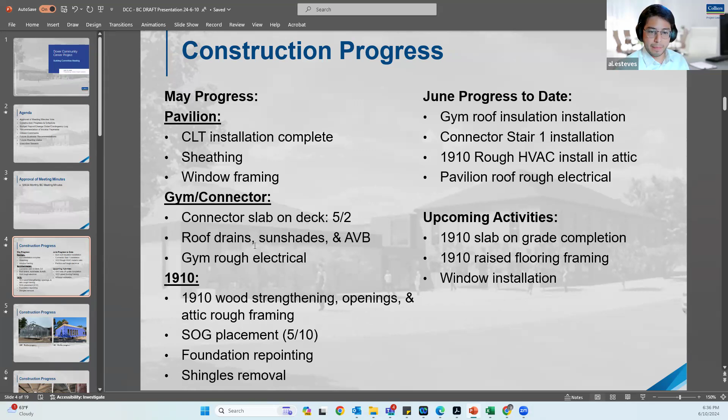Can everyone see my screen? Yes. Excellent. All right, so I'll move right into construction progress. We had a big month during the month of May. At the Pavilion building, we completed the cross-laminated timber ceilings. You'll see a picture of that. The exterior sheathing was completed, as well as the window framing. At the gym and the connector building, we placed a slab on deck at the connector in the beginning of May. We've also completed the roof drains, the sunshades, as well as the air vapor barrier at the gym building. We've also completed the rough electrical at the gym.

At the 1910 building, we've completed the wood strengthening of the structural members, as well as framing of the openings for the skylight, mechanical equipment, access, and rough framing at the attic. We've completed the slab on grade placement at the 1910 building. Foundation repointing is ongoing at the exterior foundation, as well as removal of the asphalt shingles. Since the end of May, additional progress includes installation of the insulation at the gym roof, installation of stair one at the connector piece, rough HVAC electrical installation in the attic, and rough electrical at the pavilion roof. That was necessary in order to continue with the roofing.

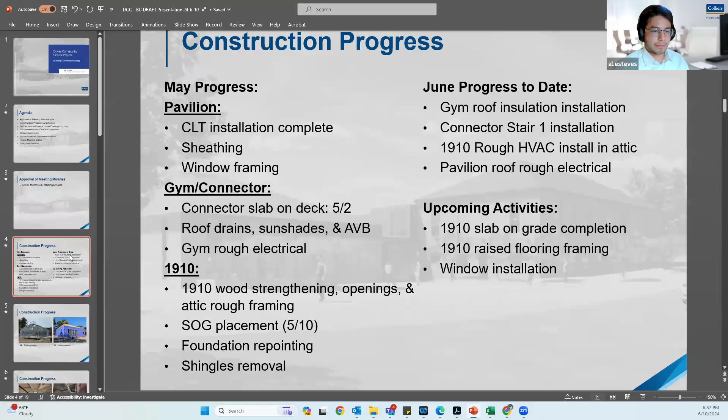And upcoming activities: completion of the slab on grade at the 1910. We're going to talk about that; we have a PCO related to that. Framing of the raised flooring at the second floor of the 1910, as well as installation of the windows. Any questions on the construction progress? Okay, let's look at some photos.

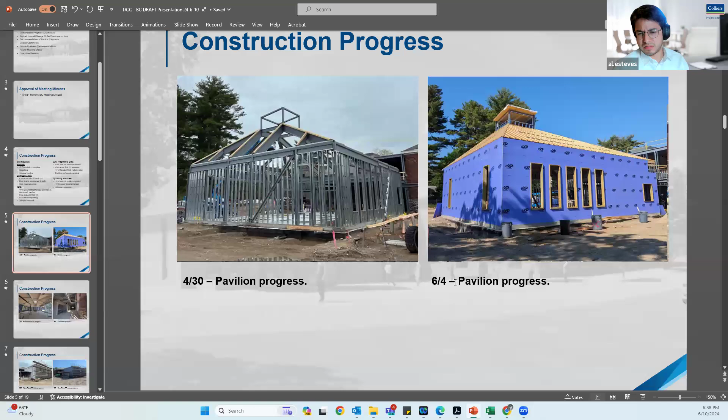So looking at the pavilion building, the picture on the left shows what it looked like during the beginning of the payment period, and the picture on the right shows what it looks like as of last Tuesday. So you can see the sheathing is installed, window framing. And looking inside of the pavilion, it's a great space to be in. You can see the exposed CLT ceiling and the exposed structure. So it's a really nice high ceiling space, and it feels really nice with the skylight. And the picture on the right is looking at the connector piece where stair one was installed, which was after I took this picture.

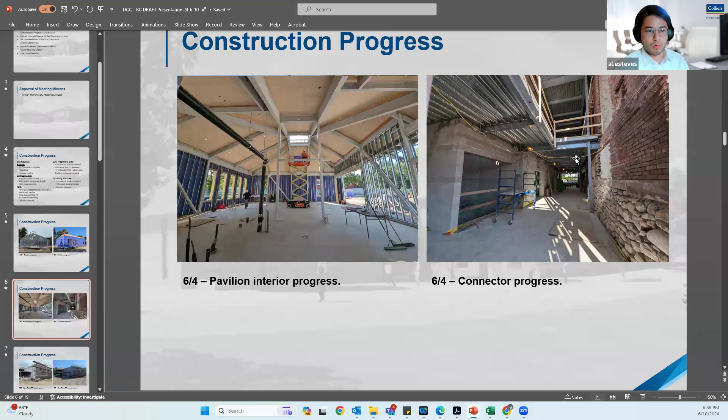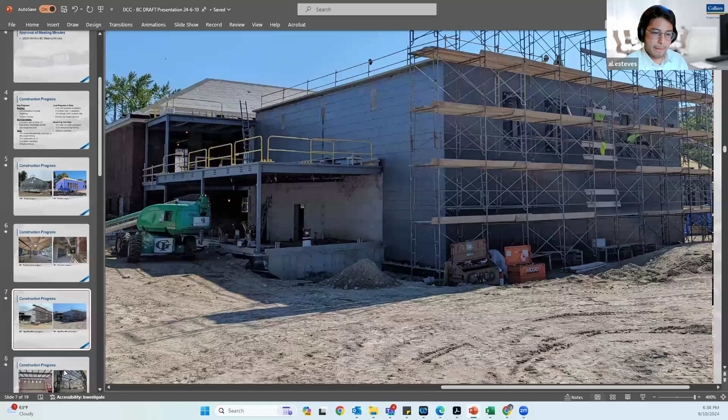Looking at the gym, progress in May, like I mentioned earlier, installation of the air vapor barrier on the exterior. You can kind of see it on this picture. And you can also see some of the sunshade structural brackets going. Inside of the gym building, like I mentioned, all of the roof drains were installed, as well as the rough electrical for the light fixtures.

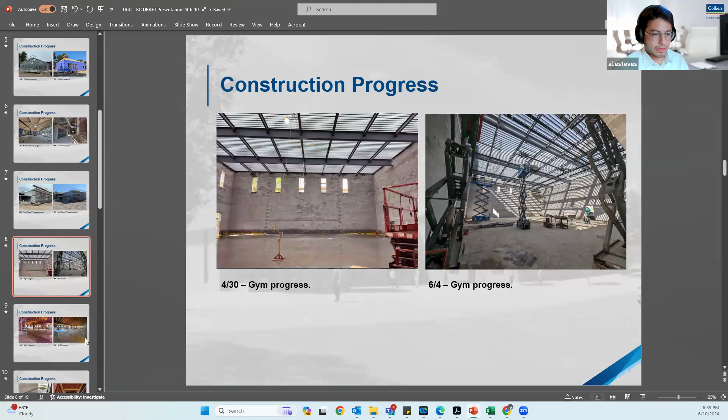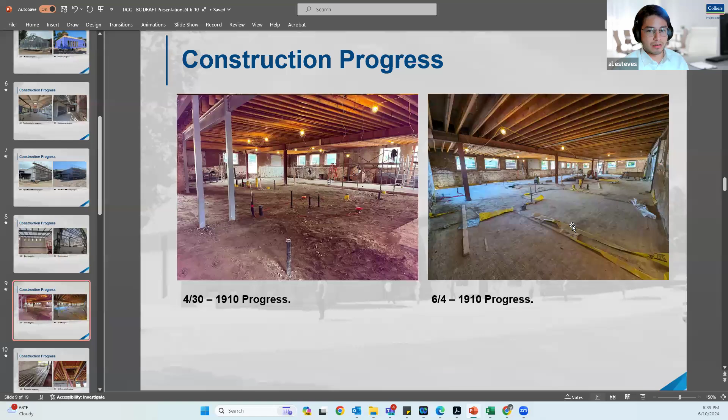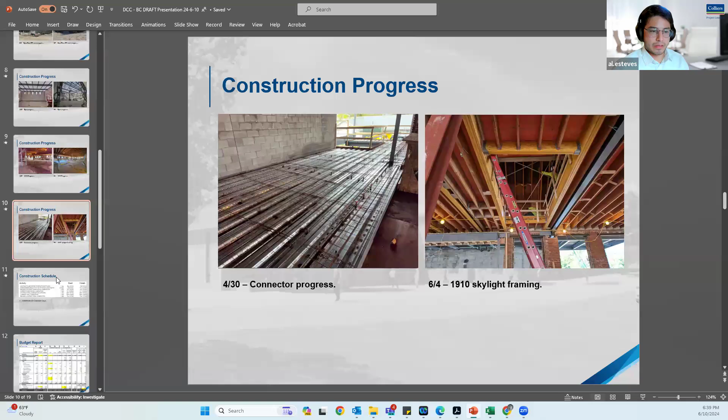Okay, moving on to the schedule. I have a couple of updates. The first thing is that we have been working with town council. We had a couple of meetings with them, and their recommendation was to withhold a portion of the general contractor's general conditions for the month of May until a corrective plan is provided. M. O'Connor is currently working on that. Corrected schedule? Yes, correct. Corrected plan and recovery schedule.

Any more questions on the schedule? Sorry, go ahead, David. Is there a timeline that O'Connor is proposing to get back to you? No, not for the contractor. They have not given me a timeline of when we should anticipate to have that delay claim. However, we are withholding their general conditions until that is provided.

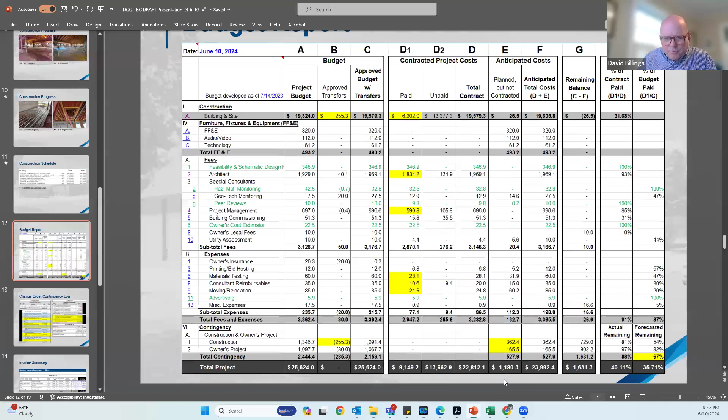So the total risk at this point is 360,000. 360,000 for construction, and then there's other soft costs for 165,000 for a total of 529. Correct. Okay, and that leaves us with 1.6. Correct. Okay. Yep.

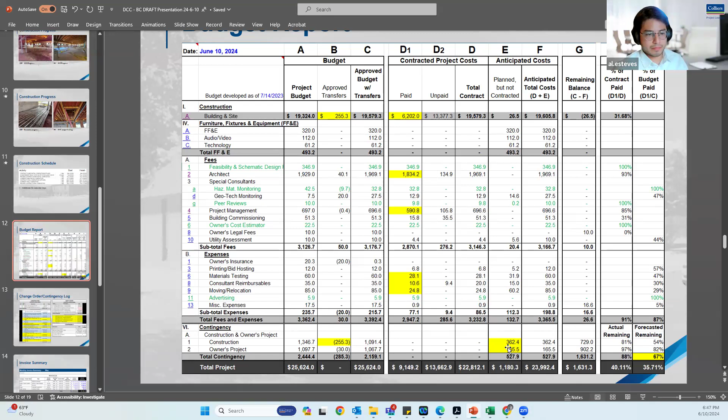As an example, PCO number 25 for the water main connection, I believe their initial price was around 66,000. Looking at creative solutions with the team during one of the OACs, we were able to bring that down to around 30,000. That involved closing of Springdale Ave. So that was thinking outside the box on ways to reduce cost. But most of these went back and forth a few times and asked for additional backup. And we feel that these PCOs are well supported and that the pricing is fair and reasonable, and we recommend that they be approved.

So starting with, I'm not sure how much in detail you guys want to get into, but starting with PCO number 12, that's a relatively small number for 3,500. That falls under the coordination category. There were a few changes that were made to some of the outlets on the floor to be tamper resistant, as well as a couple other changes.

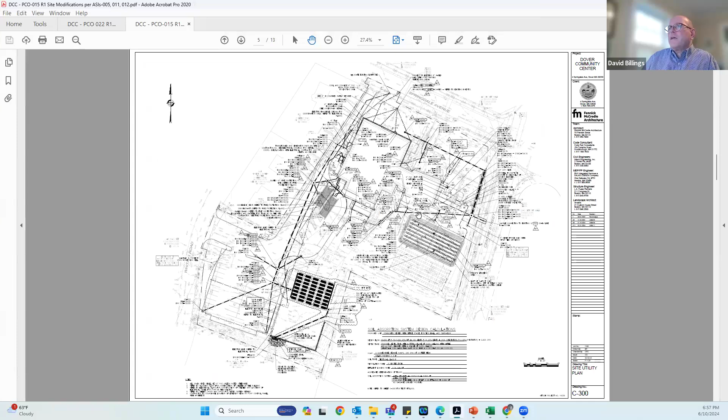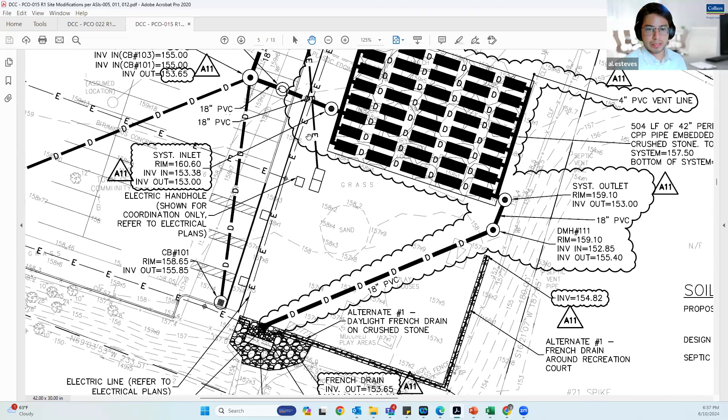And it looks like there's an 18-inch drain that's going towards the fence and then dumping out into that swale. Has that always been there? Because we had a lot of conversations with the stories next door, and we do not want to be draining onto that swale. Correct, David. So this hasn't changed as far as where the piping goes. You are correct that there were 2 drains that were added. Those 2 were approved during the first PCO in the last building committee meeting. Well, I want to make sure that this is not impacting the abutter at 12 Whiting.

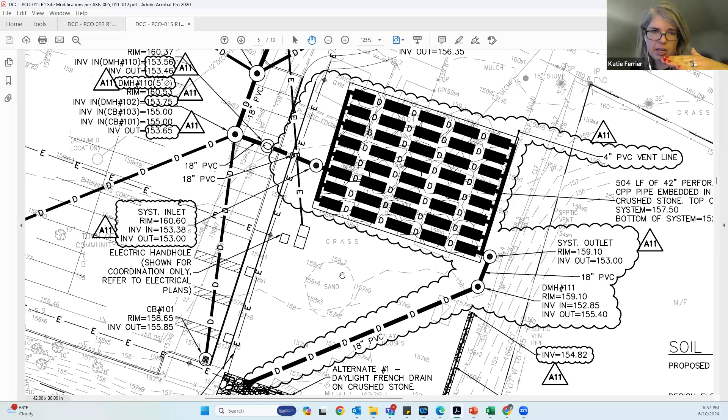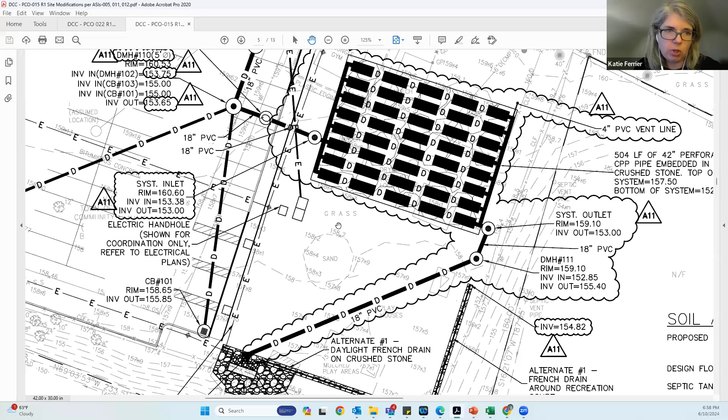Yeah, David, to answer your first question, that drain that's on a diagonal, it used to just be vertical. So there has been a drain, but the location in the lawn has changed primarily because of where the outlets are that are kind of on the right-hand side now. They were previously more in the middle. So part one, we didn't add a drain. But you can kind of see towards the bottom, there was an earlier PCO, probably predates me in the fall, where we did amend this area where the French drain is called out. So there is some additional work that we have done as far as that daylighting scope. But to answer your question, this has not been adding more to the scope.

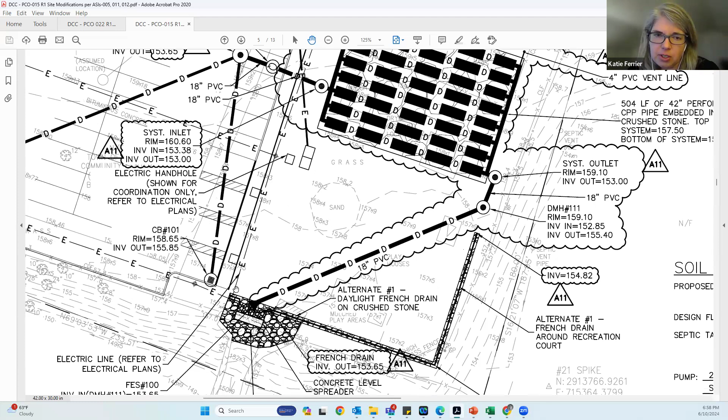If anything, all of this conversation with the town engineer really was to do a better round of, I'll say, belt and suspenders, so that with duplicating these headers, we give it a level of redundancy, just to minimize future concerns about backing up or getting clogged. All right, guys, so we're not adding any water, we're not adding anything there, it's not going to the abutter. Because that's a very steep slope going down there, so we're gonna make sure. Yeah, it's an emergency overflow, let's say.

So, Mike and Jerry, the town engineer brought this up, thinking of the water outletting on the storage property, and his concern about that. And because of that concern, he was saying a header should be added to how the water flows into this whole drainage system and how it outlets. So he was approaching this with that concern. Okay, good, all right.

So yeah, that's the PCO. Like I said, we started at around 76,000, and working with the contractor, we were able to bring the price down to 61,875. The next one, it's associated with 14, but like I mentioned, there's 2 pieces to that. That's for $3,000 associated with the plumbing inspections. The next one that we're looking at is the water main connection at Springdale Avenue. This is the one we started at around 60 something thousand, and we're able to bring it down to 30,000.

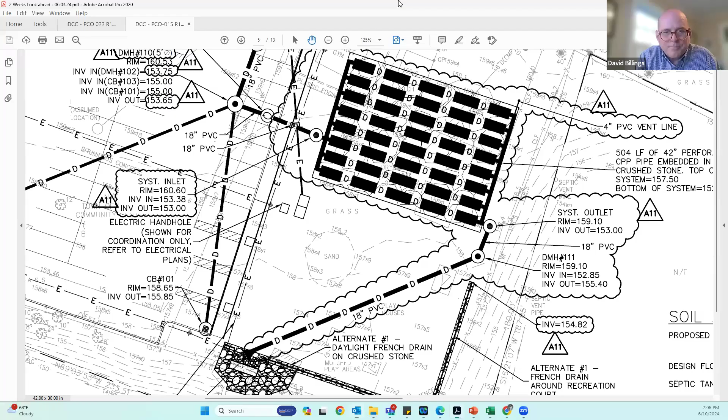Still gonna divert around Whiting? Is that the idea? Yes. All right. Is there any way of doing it on a Monday? I'm just thinking that more people may have taken the long weekend. It could be a Monday. We haven't got a firm date yet. Yeah, I'm just trying to make sure that it makes the least amount of impact on the residents and people driving through, which I'm sure you guys are too. It's very easy to divert both sides down different ways around the square.

Al, we can speak to Chris Costello and he can get some information out to warn people about it. Good idea. We're gonna also put an electric billboard sign up a week or so beforehand to notify commuters and residents. Great, lovely, thank you. Okay.

Next one is associated with the... Excuse me, sorry to interrupt, but did PCO 22, CCD? Thank you. I totally skipped over that one. So that one was presented during the last building committee meeting, and there were 2 comments. One was about trying to get an invoice not just from the insurance agency, but from the carrier themselves. We asked M. O'Connor and they said that the insurance agency, the Sanctis, is not able to get that invoice from the carrier. There was another comment, and I can pull this up.

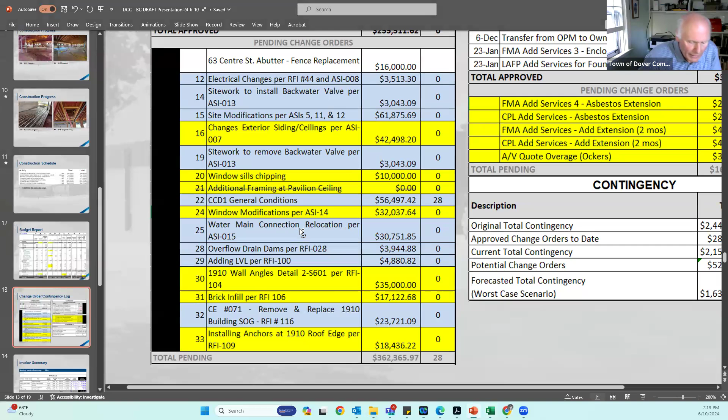Is there a motion? Motion. Is there a second? Second. Okay, I will poll the board to recommend for approval to the selectmen. David, yes. Barry, yes. Ruth, yes. And I am a yes as well. Okay, thank you, Al.

There's a couple other PCOs here that I highlighted in yellow. We're still very much working on this. Some of these are placeholders where I just put a number in. We don't have an actual PCO for those.

What's the change in exterior siding? I mean, is that a design change? I'm just kind of curious what's driving that. Katie, I'm gonna need help on this one. Yep, sorry, I had myself muted. Siding is probably not the right description for this.

So there were a couple of things that related to the canopy. So there's a canopy both at the south entry and at the north entry. Really, it's detailing. It's not necessarily new materials. But as part of that, we did look at the canopy on the south elevation, which is quite a bit deeper. And what we had was a standard rigid insulation.

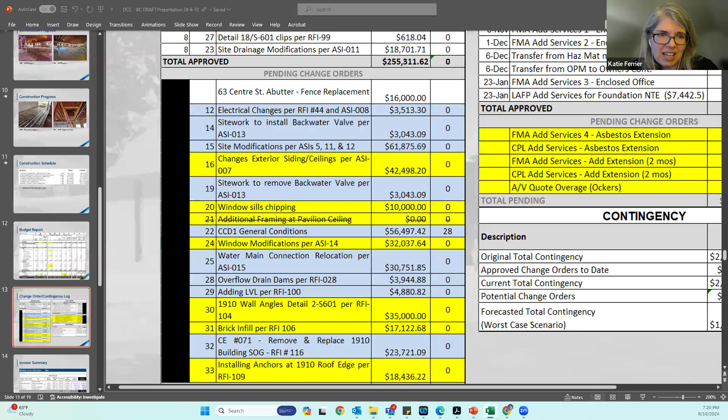Looking at that and keeping that all insulated, it got very tall. So we opted to do a closed cell insulation in that area alone, which eliminated a lot of other components. As Al said, this is one that has a lot of different pieces in it. The building is not being resided. It's not a design change in that context. But there are a number of different subs that all kind of have a piece in this. Okay.

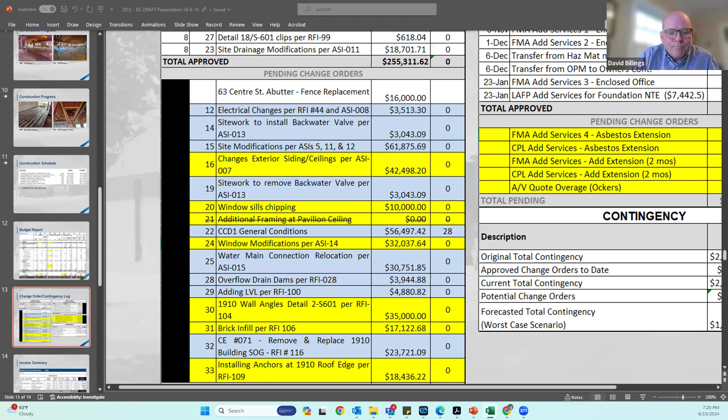I don't know if I should go through all of these, but if there's any specific comments to these, I can certainly go over those in more detail. And like I said, we're still working on those and the pricing.

Moving on to the right side, not much has changed here. The only change that I made based on last building committee's meeting and comments is we were adding a placeholder for a potential time extension. We know M. O'Connor is saying they need around 2 additional months to complete the project. So we're showing 2 months of additional services for the architect and the OPM, just as a placeholder. That's not to say that we're going to be extending the duration by 2 months, but this is a placeholder, worst case scenario.

And like I mentioned earlier, if all these PCOs were approved, including these additional services, we would be looking at 66% remaining contingency, or $1.6 million. Any questions on this?